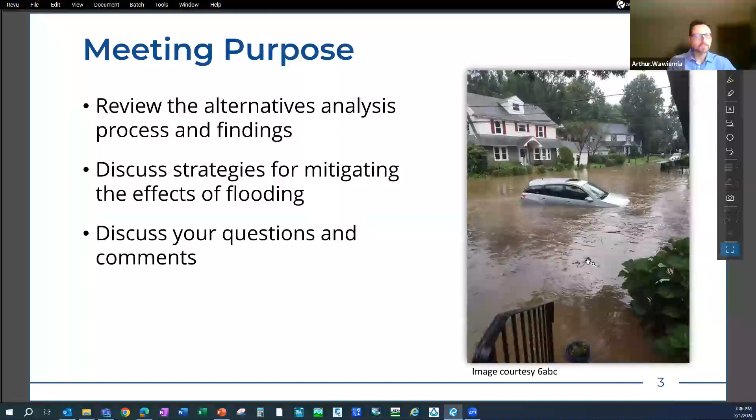So to start us off, process of the study. The structural flood mitigation options that we identified for further study in 2021 were the floodplain reconnection in Merwood Park. That was the idea of digging out dirt from the park to lower the playing field surface, to give floodwater a place for temporary storage rather than, hopefully, entering people's homes. And we wanted to see what effect that would have on the elevations. Along with that, we looked at what would happen if we just raised the existing berm in Merwood Park.

The third option was underground storage in Merwood Park, basically similar to digging out all the dirt, except this would build the playing field surface back up to its present elevation, and any infrastructure like ball fields or backstops that would be removed would get rebuilt to their original locations.

There was a fourth option in play at the time, involving digging out material in the floodplain next to the SEPTA tracks. Michael Baker and Haverford Township held a meeting with SEPTA in late 2023. We presented the idea, and it was a non-starter—a no-go. SEPTA did not want to allow more frequent flooding onto their property. They have operations and service they have to prioritize, so we disqualified that option a couple months ago.

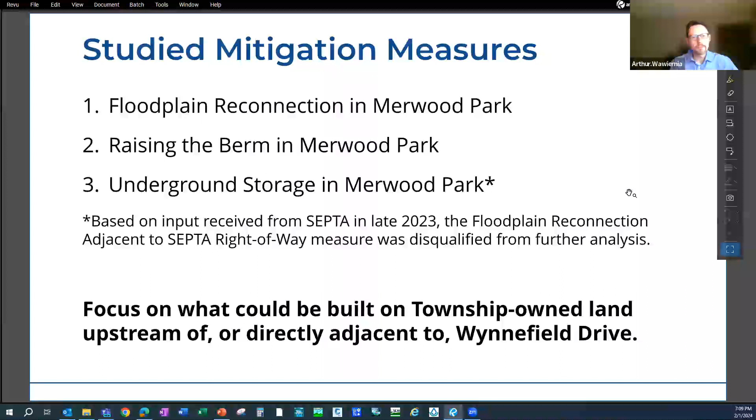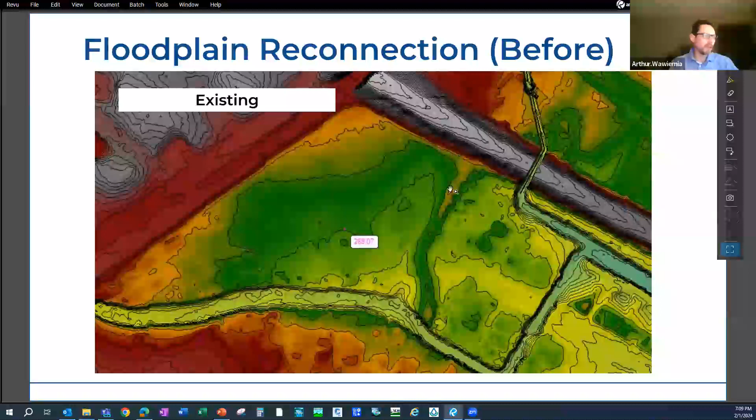First, the idea of floodplain reconnection. This graphic shows land contours. The color shading represents elevation—the red areas would be Hathaway Drive and the bus lane, and the gray areas are the SEPTA tracks, which are all higher in elevation than the park and ball field. We're not seeing any features from aerial photos; it's just a way to communicate what the land is doing. You can see the channel at the bottom using light green and yellow, showing lower elevation areas. This is a snapshot of existing conditions, and you can see the berm here.

In the proposed conditions, we propose to lower the floodplain of the park surface by about a foot. This meant a 2,300 cubic yard excavation volume, which would require about 230 dump trucks to haul the material out—enough to fill almost three-quarters of an Olympic-sized swimming pool.

As for the berm raising option, this is the same type of representation. You can see the existing berm is a little taller towards the railroad end. In the proposed conditions, we looked at two scenarios: raising that berm to match the 100-year flood elevation per the FEMA maps, and another option of adding an additional foot on top of that.

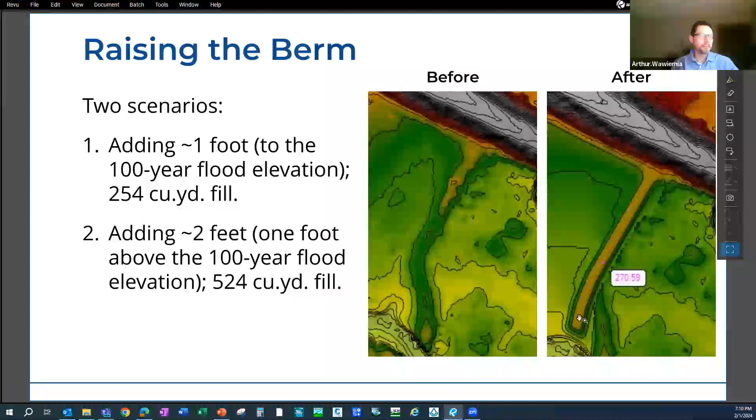Without getting into too much detail, there was a limit on how tall we could make this system—about 3 feet. That's because the existing stream banks are only about 3 feet high in most places next to the ball field, and the groundwater level is always going to be there. When you're standing in the creek, the water is at your ankles, and that line extends into the ground to either side, defining the groundwater level. You can't simply create more space by digging a deeper hole, because that space below would just fill with water the whole time.

Going back to the rationale of the floodplain lowering, there were limits there too. It's not shown here, but where the creek passes under the bus lanes, there are retaining walls extending from that area toward the east of the park. We assumed we couldn't touch those retaining walls, and we assumed we couldn't touch anything on the downstream receiving end next to the property.

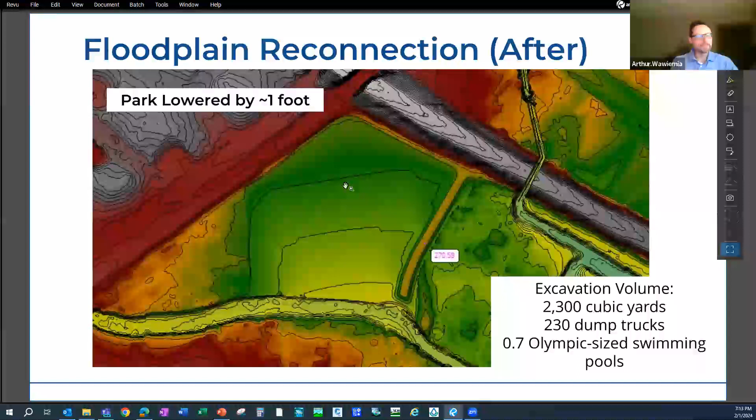The storage was designed with a weir overflow sized to take an incoming 100-year flood event for a certain area and pass it through. What we found through this analysis was that we could get an underground system here to manage runoff from only 37 acres of the total drainage area of Cobbs Creek, which is over 1,200 acres. That only works out to about 3%.

On the right is just a graphic. When we talk about acre feet, the acre is a unit of measure that goes back to Imperial Britain, but it's an odd one - it's a tract of land 66 feet wide, 660 feet long, a foot deep. Those odd measurements were derived from surveying instruments of the time.

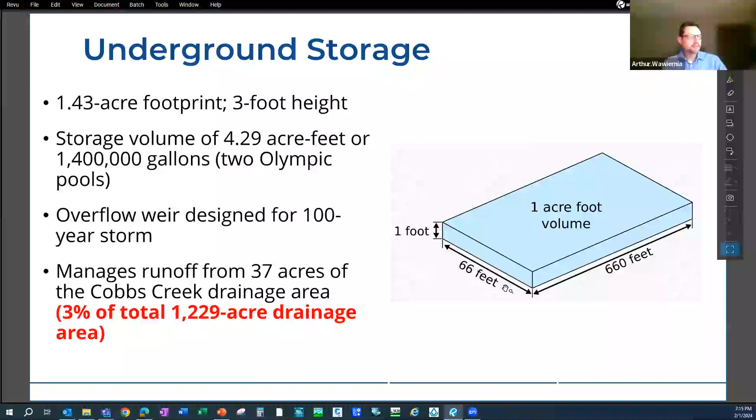So the basic steps of the study - there are 4 steps. First, we had a topographic survey done of the stream channel, which was important to get accurate elevations on the channel and the bridges, footbridges, and road structures that cross the creek. Next was preparing the concept grading plans, which helped us understand how low we could grade Merwood Park down to.

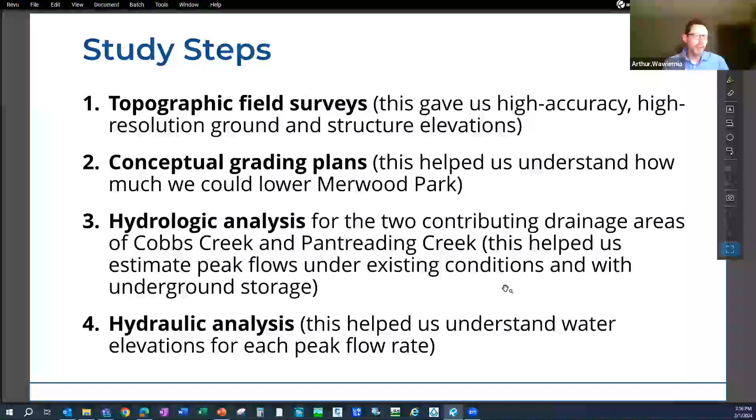The final steps were the hydrologic analysis, which tries to estimate how much water is coming down each of the creeks that feed into the area, the Cobbs and the Pantreading Creek. And the hydraulic analysis takes those flow rates computed in step 3 and sees what that means - what kind of water elevations, flood elevations, you're getting through the site.

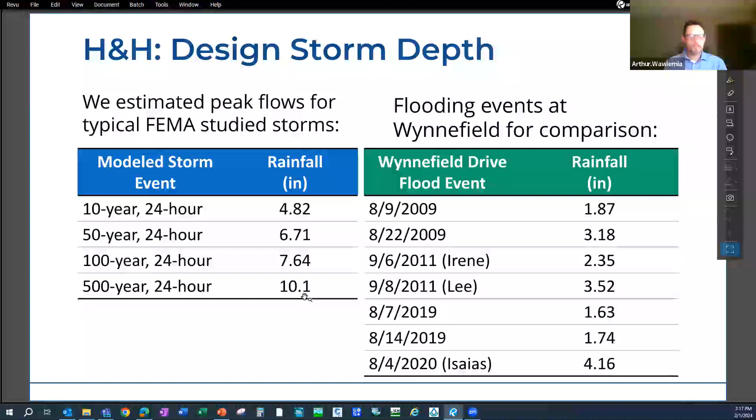But when you look at that middle 1 hour of the 4 design storms that really have a lot of rain falling in a short amount of time, if you break that down to the most intense 1 hour of the storm, you get numbers for those design storms that are 3, 4, up to 7 inches per hour. That is a lot of water coming down in a very quick amount of time.

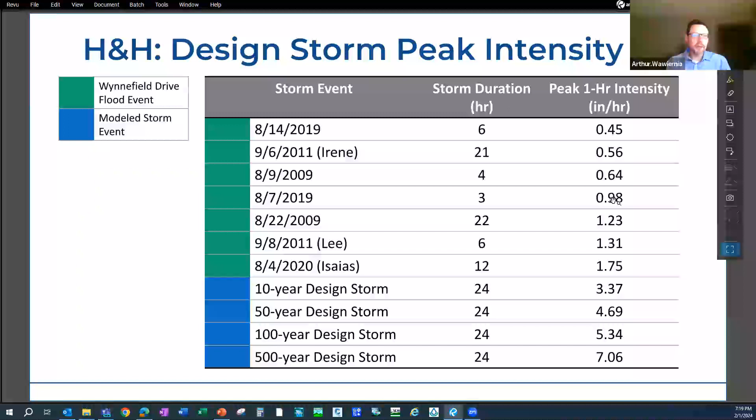But when we looked at the rain data for the dated storm events, these are actual recordings. For example, in Irene we saw 21 hours where a rain gauge measured rain, and the 1 hour with the highest rainfall had 0.56, about half an inch, equating to about a half inch per hour. So what this tells you is the storms that FEMA models, that we modeled, are more intense than a lot of the storms that have already flooded your neighborhood.

Now we're just going to talk a bit about the peak flows, or the flow in the creek itself. There is a stream gauge that the USGS runs, but it's down at City Line Ave where it crosses Cobb's Creek. You can't really use the data from that gauge for much other than to compare with it.

For these flood events, the flow rates would be at the stream gauge at City Line Ave, and these are all computed by the USGS using long-term data. They record stream flow every hour, probably for decades down there at the gauge at City Line Ave.

So all this is saying is that the 2019 August flood was a little over 2,000 CFS, and where that ranks at that gauge puts us somewhere between a 10 and a 50-year recurrence interval.

I've probably said this before, but I'll reiterate: when we say a 10-year storm or a 100-year storm, all that means is in any given year, a 10-year storm has a 1 in 10 chance of happening, or a 10% chance in any given year. A 100-year storm has a 1% chance of happening in any given year. You can have 100-year storms on back-to-back days or back-to-back weeks, or you may not see a 100-year storm for well over 100 years. That's just statistics.

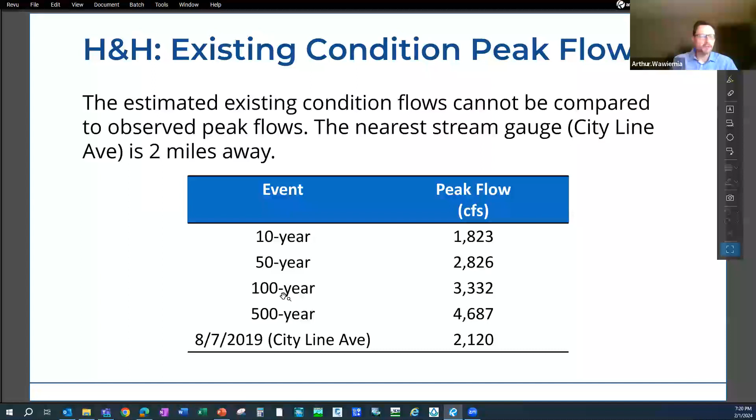Okay, so now to the study findings. I know a lot of you have downloaded the study—it seems I got a lot of email notifications that it was downloaded from our upload link. So you probably know the bottom line of what we're getting at here.

But what we found was, looking at the entire drainage area of Cobb's Creek upstream, that's 1,200 acres to Merwood Park. What was a little more surprising to me was that Pantreading Creek was over 700 acres where it joins Cobb's Creek.

And you compare that to the available area in Merwood Park, which is only about 1.4 acres. So we have a lot of water coming down to an area that's flooding, and there's just not a lot of space for the types of practices that we had proposed.

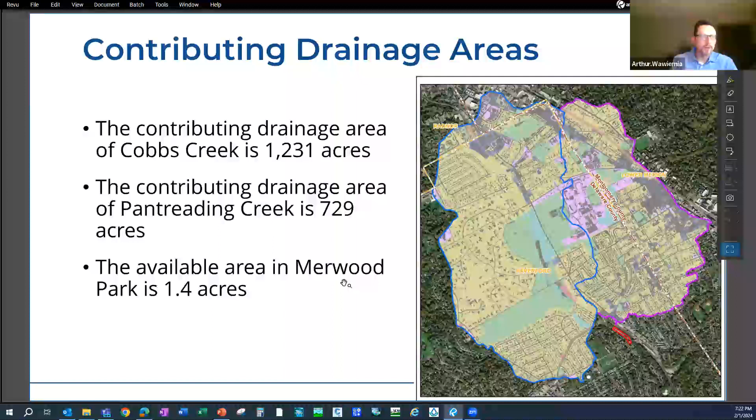Just the kind of study we did, this H&H study—we really went for efficiency here. We looked at this with the most efficient tools possible: a 1D hydraulic study using HEC-RAS. We didn't go out of our way to introduce any more complicated models into this. We just wanted to get to some answers as quickly and efficiently as we could.

So what we found was that fortunately, none of the options had really an effect or impact on the water elevations at Wynnefield Drive or at Merwood Park. The underground storage facility was the only one that actually decreased the flood elevations, but those were about an inch or so, and not enough to really make a difference.

And that underground storage facility—we worked with a vendor and estimated the cost, and it came to $5.5 million. Maintenance costs annually would also have to take into effect just how you would have to go about cleaning the muck and debris and so forth out of that thing every time a storm happens.

So I think what this really does is show you just how bad the problem is. To really make a difference at your site, you would need to put in about 33 of those underground detention systems that we sized and worked with the vendor to model. We need about 142 acre feet, and that works out to 46 million gallons—66 Olympic-sized swimming pools.

Or put it another way, you can see on the map here—if you were able to grade and excavate out Merion Golf Club to become a flat basin and could fill it with a little over a foot of water, that's what it would take to really help decrease flooding at Wynnefield Drive.

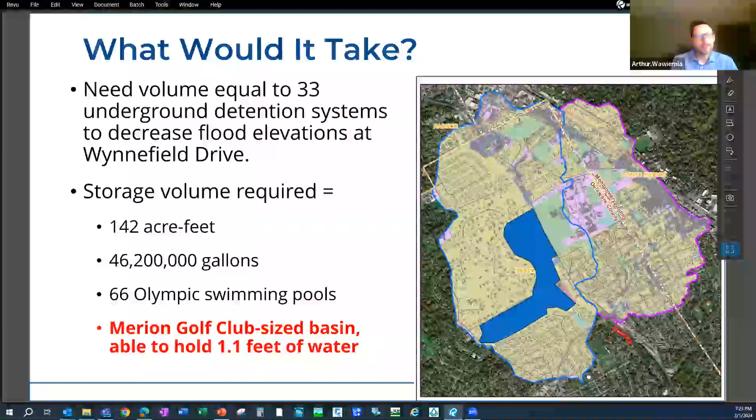So what can be done? I think it's worth revisiting some of the flood-proofing options that we had brought up in our study previously, and really, they are looking like the only means we have that are cost-effective and viable ways to reduce the flood damage and the risk of flooding in the study area.

Again, windows, doorways, basement doors—some flood-proofing in areas. You see actually people building up small berms around, say, the basement windows that we see in front of some of your homes.

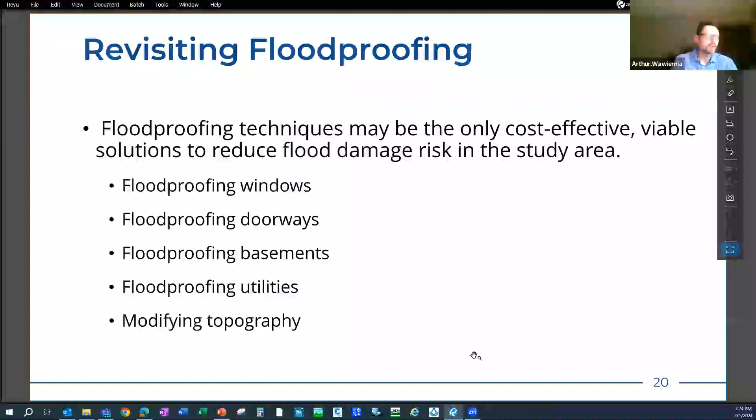And now Tamara's going to speak to this slide. She has some relevant news to report from other work that Michael Baker's done down in Alexandria, Virginia.

We were working with FEMA Region 3 on some mitigation. They call them mitigation coffee breaks. They're just like 1 hour learning sessions.

The most recent one had a really interesting example that brought this case to mind from Alexandria. The chief stormwater engineer from Alexandria talked about what was going on down there, and how since 2019 or so, they've been seeing a totally different type of rainfall event, which they're calling cloudbursts. They're getting tons of rain dumped in a short period of time, causing urban flooding, and a lot of residents are having their basements flooded.

There's really nothing they can do to stop these cloudbursts from happening. So they were working with the state to see what they can do to help residents protect themselves from the flooding and make these events less problematic for the residents.

Virginia, like Pennsylvania, is a Dillon's Rule state, so the city couldn't offer a type of grant without authorization from the state. But they managed to pass legislation at the state level to have a stormwater utility that would provide fees going into this flood mitigation grant program. They just rolled it out in the last couple of years.

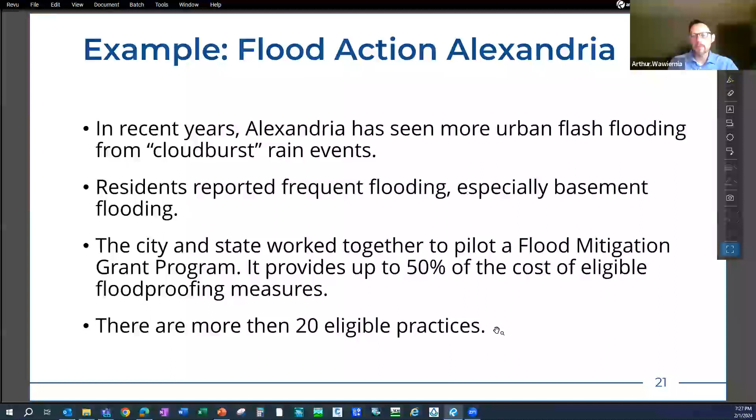So going back to some of the recommendations we have after finishing the study: waterproofing, flood shields, flood barriers on the means of entry like garage doors, windows, and basement entry doors, sump pumps, and French drains in the interiors of the basements.

I've got one in my home, I've had to put it in. Sealing those cracks in your foundation walls and slabs in the basement, waterproof coating on walls, possibly permanently sealing up those doors, putting in Bilco doors to replace your entry doors.

And there's this topic of a basin-wide flood early warning system, something the Army Corps looked at many years ago for your site and others. In the absence of other measures that don't work, it's one of the ones that could work.

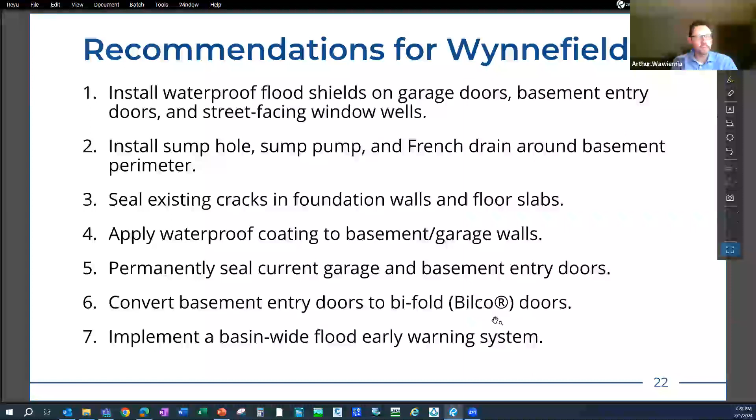I just wanted to find some options and examples of what we're talking about here. I was able to find some of these Googling today - something called a quick dam that can sort of unfold and expand, or inflate, up to 3.5 inches high in 10 minutes, and can be stacked.

There are these other barriers that are placed in front of doors to fit them. We can provide this PowerPoint. There's an article in Popular Mechanics that shows some of these, including the quick dam and a quick dam floodgate. These are available for purchase in the U.S. I did find some overseas at first, but there are products out there.

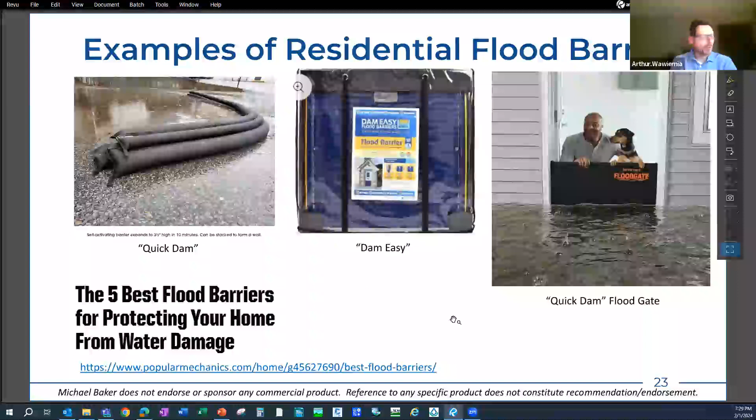Now I just want to talk about some of the ideas or problem areas that we looked at earlier in the study, or potential solutions we heard about from you folks, and close the loop on some of these.

The idea of flood walls or levees - at this site, levees are usually earthen berms that are pretty wide in footprint. We'd talked about flood walls, something like you see here, more like the sound barriers along the Blue Route. These would really transform the way your neighborhood looks forever.

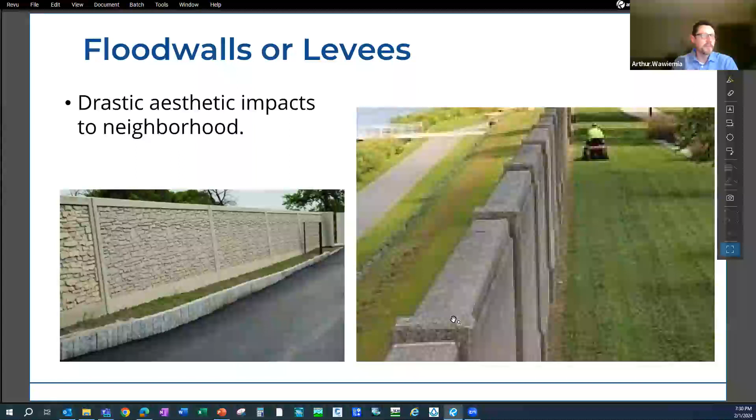These flood walls also give a false sense of security sometimes. They'd really alter the look of your neighborhood, but that's a moot point because DEP would not actually permit this.

It's the same sort of thing where these flood walls would actually have to go in and line the creek all the way from Hathaway Lane to Eagle Road, on both sides, effectively sealing in the creek to the channel.

But like I said, DEP today would not permit this - the township or DEP would not allow it.

The township has a floodplain ordinance that no development is allowed in the floodway or the floodplain. It's a standard type of ordinance that many communities across the country have, as the vast majority of communities belong to the FEMA flood insurance program.

As part of that, in order to offer flood insurance, the township has to enact an ordinance saying that they'll limit and restrict development in the floodplain.

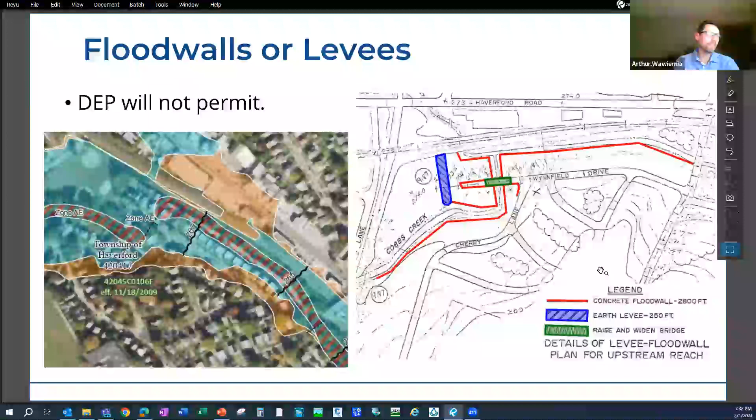I'm not actually sure, but this bridge, and there's another bridge a little bit upstream of the swim club - a SEPTA track over top of it. We found that there were no obstructions in the channel that we could see.

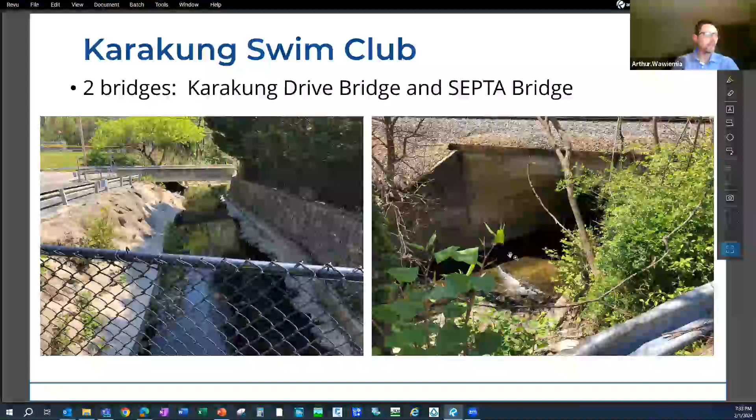We also looked at the FEMA flood study. This is a profile - imagine if you could look into the creek, standing on the bank, looking at the creek, with the water flowing from right to left.

This is just plotting the bottom of the creek channel as the bottommost line. There are a few thicker black lines that almost look like the letter I, like this one here.

That represents the bridge, the deck of the bridge over the creek. The bottom of the I would be the lowest part of the beam, and the top would be the top of the parapet. So down here, Karakung Drive and its bridge are shown way down here.

The swim club is sitting about here, and the SEPTA bridge is this thing here. If you were to completely block the SEPTA bridge or the Karakung Drive bridge, either one, that would create this backwater effect that you can plot backwards, or upstream.

If that thing was fully blocked, it would not affect your site because that water just projects backward. But here it's extended to the creek channel. In reality...

These other lines you're looking at above - remember the 4 FEMA study design storms, the 10 through 500 year? That's the model flood elevations given by these dashed lines. The lowest one is the 10-year, and the 500-year is this top one, shown as the solid black line.

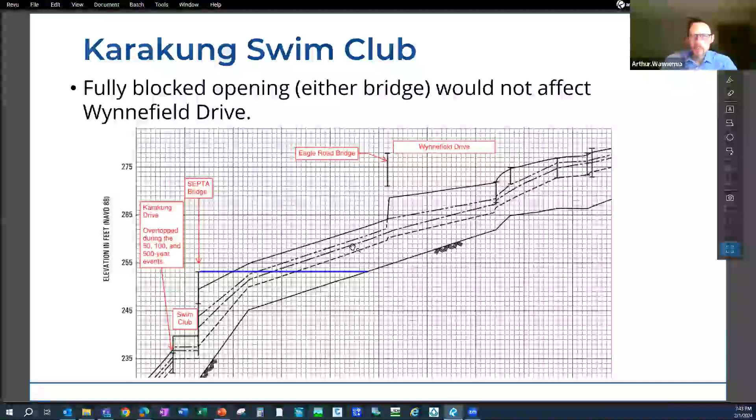I have a question. I'm at 2415 Wynnefield, so I'm up near Eagle Road. Yes. So my question deals with Eagle Road and what we were talking about with the water coming down there. I've lived here since 1982. And I don't want to sound cold to my neighbors further down the street, but there didn't used to be the flooding problem up this end of the block that there is down further towards the park.

I have no idea if it's because we're a little bit higher or if it's something else, but can't we get the state to at least fix that and maybe alleviate the problem for some residents? My neighbor across the driveway has his accounting office in the basement, and every time it rains, he's shoveling water out of his office. And that didn't happen when he moved in.

I totally get the cloudburst thing, because that's what it looks like to me whenever it rains now. My rain gauge will say we got 5 inches of rain in an afternoon, and yet that's not what you're going to hear on the weather. So maybe it just rains harder in certain places. I'm totally fine with maybe having to fill in my driveway or get rid of my garage, if that's what we all need to do to save the neighborhood.

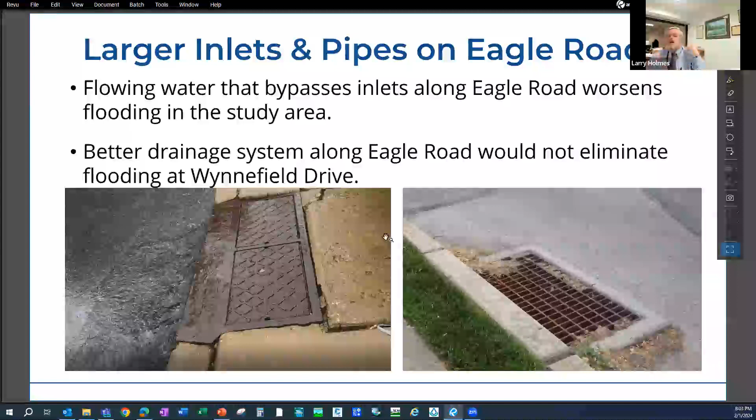If you took out the two 90-degree bends, yes, that would create less of a backwater effect into Merwood Park. And you're right, there's a lot of hurdles to overcome with property ownership just to try to straighten the creek out a little bit. But even if you don't straighten the creek out, think of the wall that the water's hitting. The water's coming straight out of Merwood Park and smashing right into the far side of the wall. If we got the permission to dig that wall out.